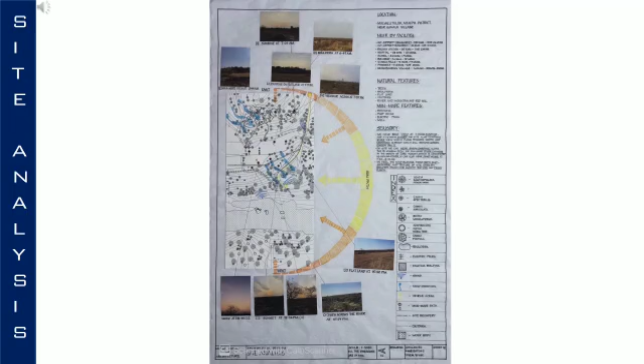Ganalu Falls, 4.1 kilometers, 17 minutes, and nearest pharmacy, 7.6 kilometers, 15 minutes. Moving on to the natural features of our site, we have trees, boulders, contour, river, mountains and red soil. Coming to man-made features, we have pathways, pump house and electric poles. In sensory terms, we have the best view at 7am sunrise and 6pm sunset.

The site also contains a river view which flows towards north, and mountains in front which will remain green. On site, we can hear birds chirping along their migrant path. We can also hear the river flowing between June and August, which is considered to have healing power. We can hear the pump house in the morning from 7:40 to 9am. We can feel the wind blowing from northeast to southwest, and the texture of the site is given by boulders as smooth, and prickly plants as rough texture.

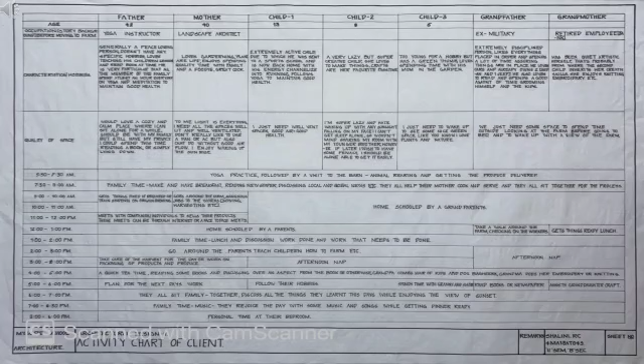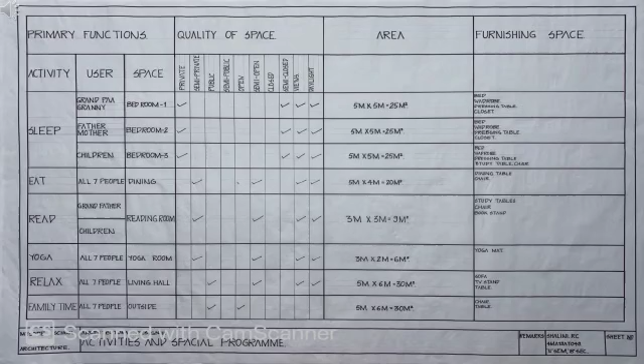Storyboard helps us illustrate different types of activities happening at different times. It not only helps us in navigation of activity, but also the spaces around it and the users too.

I studied Black Desert House by architect Oller and Pejic. The clients were Marc and Michelle Atlan, and the type of building was a residence, located east of Los Angeles in Yucca Valley. Materials used in the building were aluminium, mirrored glass, and plain cement concrete. The context of the home was to have a minimalistic approach.

Moving to design process, the clients instructed the architect to build a house like a shadow, because the sunlight in the desert is often bright and the eyes only look for a resting place under the shadows. Organization of space was in linear sequence. The experience of navigating inside the home felt like being out on the site.

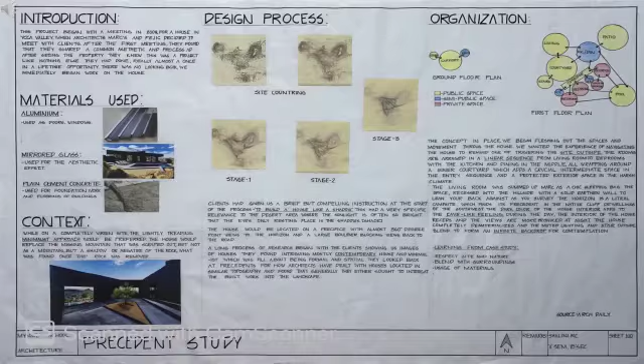They had a dark color interior for a cave-like feeling during the day. At night, the house completely dematerializes and the stars outside blend to form an infinity backdrop. Details of the home include plan, elevation, view from home, and section.

Moving forward to how are we designing, we were asked to pick up one point from each case study as objective. From Krack-a-Dawn, I've learned that after the usage of space, it should be better than it was before, something which is nature's beneficial. From Ramesh Kikkeri sir's home, I've learned minimum or recycling of waste. From Rafiq Azam sir's session, I've picked up to bring balance between inside and outside, sorting the space harmoniously with the nature surrounded by it.

From case study 1, Black House, I've learned to give a minimalistic approach. From case 2, Palswada Residence from Tushar and Parikh Associates, I've learned to use locally available materials within 150 kilometers.

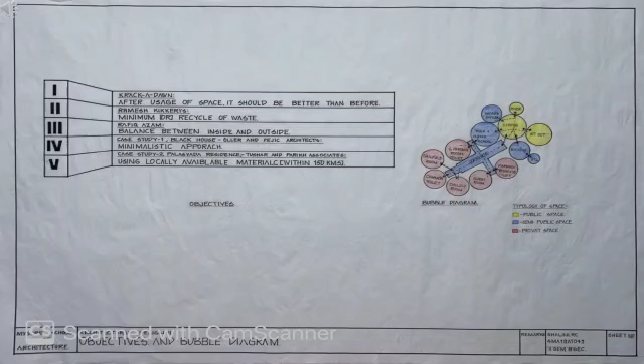Coming to bubble diagram, it is a graphical method of organizing space within a design. This is purely for understanding a building's functionality and how to make it more user friendly. We also study which space has to be positioned where. In order to do this, we need help from a proximity chart to build it. This not only helps in prioritizing space but also helps us learn how to access one space from another. The color is based on typology of the building, like public, semi-public and private space.

Coming to proximity chart, it is the simplest form of diagram which illustrates the spatial relationship of the proposed building. It is basically the understanding of which space comes next to it or further away from it, and why. Coming to the methodology, we pick numbers, where 1 is the closest and 5 is the farthest. This helps in prioritizing space and it may differ from client to client.

Coming to concept for home, we took a little help from animal architecture to inspire us. We studied about their homes, how they construct and live, spaces in their home, materials used, etc. We chose 4 of our favorite animals.

Australian leaf curl spider: its function was to protect eggs, the material used was saliva and leaf, and the structure was spiral and DNA pattern.

Second one was the American robin bird. Its functionality was to keep the bird warm. The material used for the first layer was clay, and the second layer was straws and sticks in a weaving pattern, and the structure had a bowl-like shape.

Third was termites, whose material is a mixture of saliva and soil, structure is a mud tube, and functionally it is known as nature's architect as it has taught us about the air exchange system.

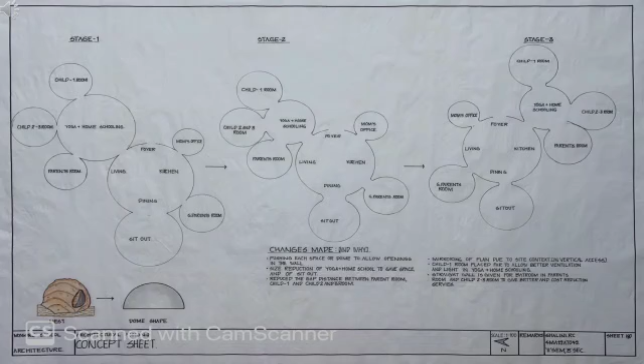In stage 3, there's mirroring of the plan due to site context in the vertical axis. Child 1's room is placed farther to allow better ventilation and light in the yoga plus homeschooling area. A straight wall is given for the bathroom in the parents' room and child 2 and 3's room for better service and cost reduction.

Keeping the concept in mind, I moved forward for design development, inspired by nature's form, functionality and color. After evolution of the design, I arrived at the stage of the plan, where at the entrance we have a foyer, office, living room, grandparents' room, sit-out, kitchen and dining, yoga plus homeschooling, and child 1, child 2 and 3's rooms, parents' room, and balcony and garden.

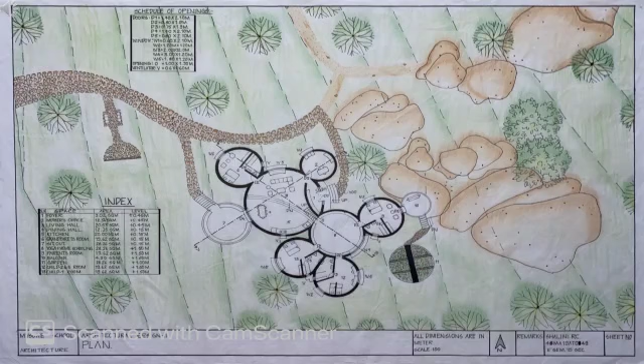Coming to qualities of space, I did try and achieve everybody's requirement.

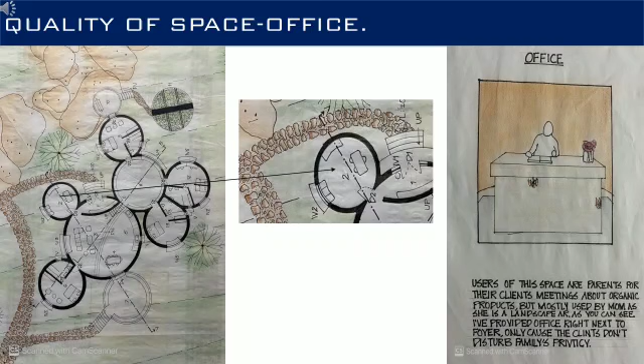Users of this space are parents, for client meetings about organic products, but mostly used by mom as she is a landscape architect. As shown in plan, this space is right after the foyer, only because I did not want clients to disturb the family's privacy.

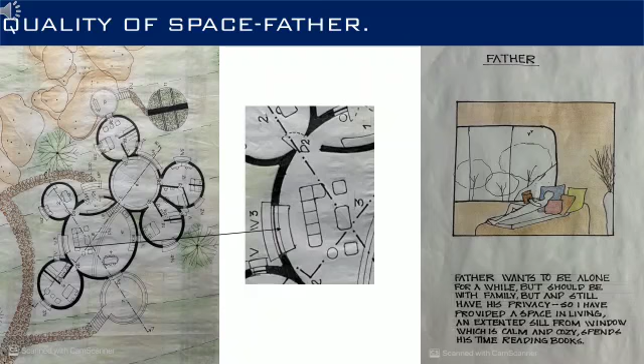Father wants to be alone for a while but still be with family and have his privacy. So I have provided a space in the living room, an extended sill from the window which is calm and cozy, where he spends his time reading his book.

Grandparents wanted a space to spend time looking outside at the farm before going to bed and wake up with a view of the farm. So I've provided a space in the bedroom where they can look at the farm, enjoy their view, and talk to each other over a cup of coffee.

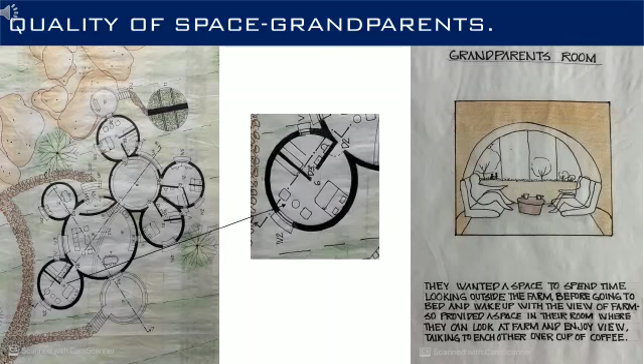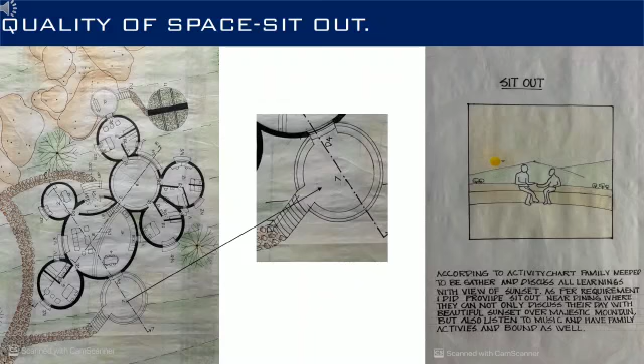As per the activity chart, the family needed to gather and discuss their day with a view of the sunset. As per this requirement, I provided a sit-out near the dining area where they can discuss their day with the beautiful sunset over majestic mountains, listen to music, and have family activities and bond as well.

Moving on to the dining hall, it is located near the sit-out which has a huge opening to bring in good ventilation and a beautiful backdrop of mountains behind it.

Coming to yoga plus homeschooling, which is combined, the yoga space has a window opening through which we can achieve a panoramic view of the sunrise while doing yoga, making one feel positive and better. For homeschooling, I do not have any interiors for this space, as I believe that after doing yoga, the room and the mat used contain positive energy, and taking advantage of that, using the floor and mat is much better for studies.

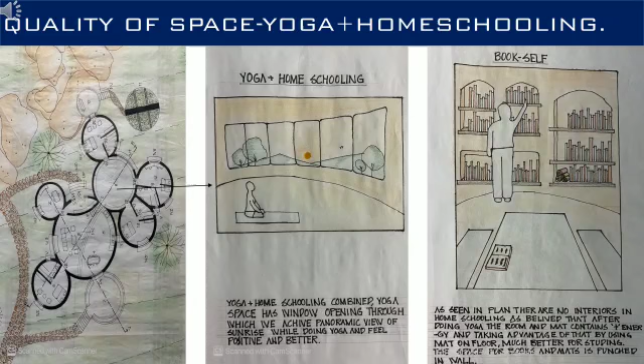Space for books and mats is punched into the wall.

Child 1 is very energetic and interested in sports, so I have provided a space outside the home for him to enjoy playing basketball and wall climbing with his siblings and have fun.

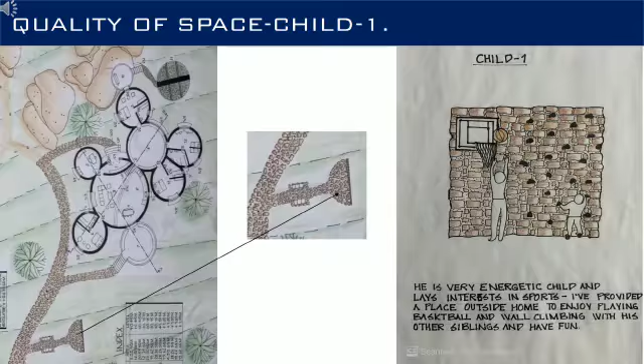Child 2 has artistic skills and is very creative, but lazy and does not like waking up to the sun. Child 3 is too young for his own hobbies, so he accompanies his sister in artwork and has a green thumb like his mom, and he loves waking up to the sun. As they share a room, I have provided a partition where child 3 can wake up to the sun while it blocks the sunlight for child 2, whose room is still well lit due to a window facing south.

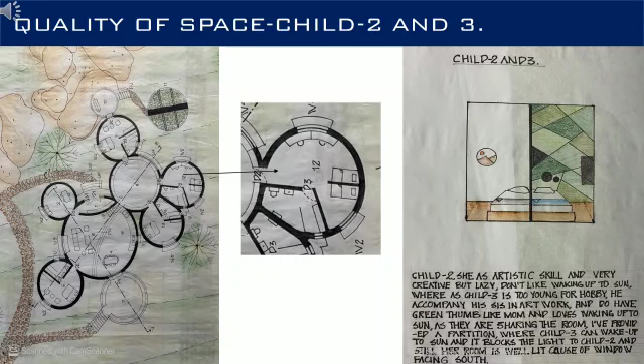Mother is a landscape architect and loves plants, so I have provided a balcony in her room supported by boulders below it, where she can enjoy her morning cup of coffee on a swing watching the sunrise, with access to her private garden.

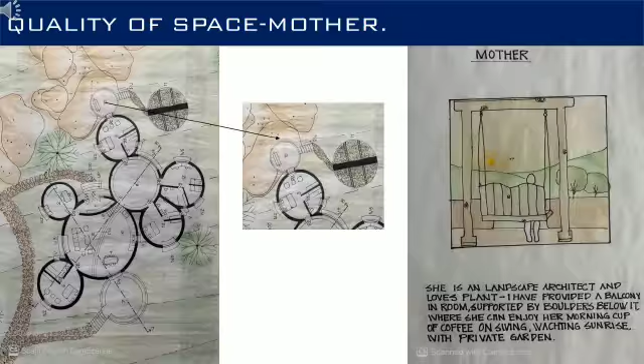Site planning has helped me in understanding the levels on site, drain sloping, vegetation, views, and sun angles. Detailing of the plan is done through section, elevation, and isometric view.

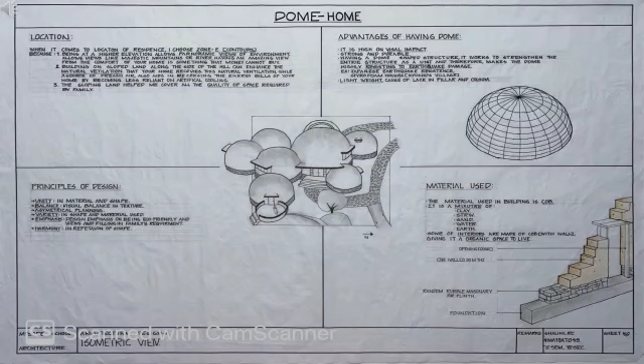The material used in the building is cob, a mixture of earth, fine aggregates and straw. Flooring is also done with cob, with a linseed oil coating. The plinth is made of random rubble masonry. Some interiors are made of cob as well, for example the wardrobe, shoe rack, sit-out bench, punched wall shelves to keep books, window sill, and so on, just to give an organic touch.

In conclusion, I would like to say that since the existence of mankind, we have searched for a better lifestyle, health, and so on, and nature has never failed to inspire us. I hope that this design has influenced even 5% towards a better and more comfortable lifestyle for the future. Thank you.